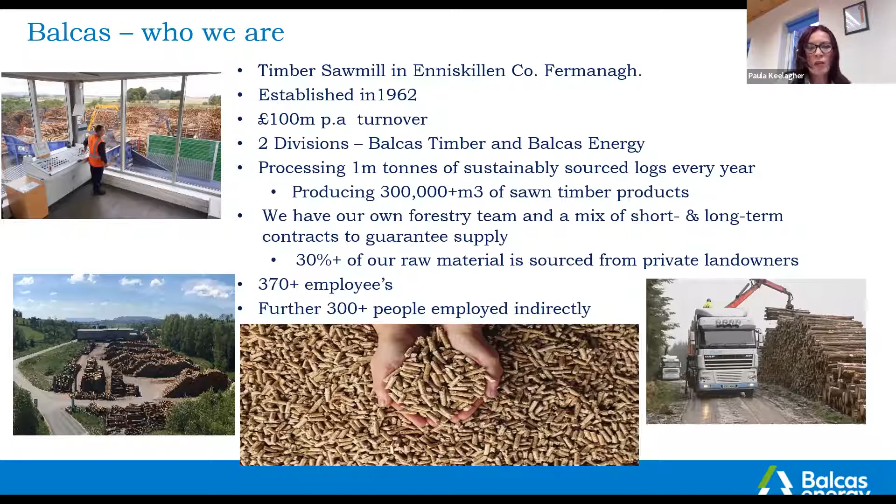30% of our raw material is sourced from private landowners. We have over 370 employees, and we've indirectly 300 other people employed, subcontracting, lorry drivers, etc. Balcas pioneered wood pellets in 2004 in Enniskillen, and then we had our Invergordon plant coming out afterwards in 2009.

We are very proud and pleased to be part of the Lennon Brothers group. Lennon Brothers is a family-owned Irish business with sawmills in Longford and Fermoy in Ireland, and Troon in Scotland, and timber frame home manufacturing plants in Arklow and Troon. The Lennon Brothers group, including Balcas, generates 14.5 megawatts of electricity. It's self-sufficient renewable electricity that comes from all of the forests of these islands.

We process more than 2 million tonnes of logs per year. 100% of this resource grows back in balance with its harvest. There's over 900 full-time employees, mostly in rural locations. Annual turnover is 350 million. We manufacture 800,000 metres cubed of sawn timber and produce over 2,500 timber framed homes. And I think we're a leading example of sustainable and circular economy in action.

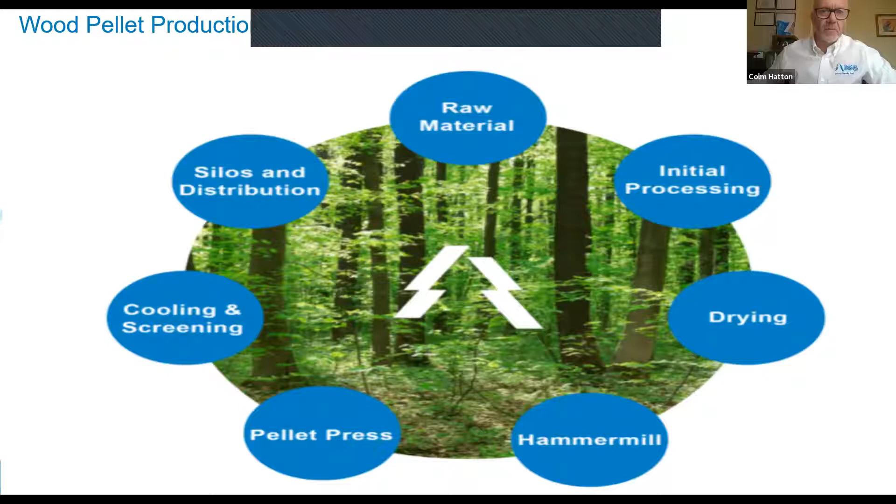I want to talk a little bit about the process of making wood pellets. So at the start, obviously, it's the raw material. This is high quality sawmill residues and inferior quality logs not suitable for use as sawn timber. Initial processing reduces particle size and screens out oversized material to improve the efficiency of the drying process. The material dries at an air temperature of more than 100 degrees centigrade, which reduces moisture content by up to 50%. And this is all using heat from our on-site CHP plants.

Particle size is further reduced in a dry material hammer mill, ready for pressing into ENplus A1 quality wood pellets. Raw material then is extruded through the pellet forming die at very high pressure. This process draws out the natural lignin of the wood, which helps bind the material together. The pellets are then cooled from approximately 90 degrees centigrade to less than 40 degrees. This ensures they are fully hardened.

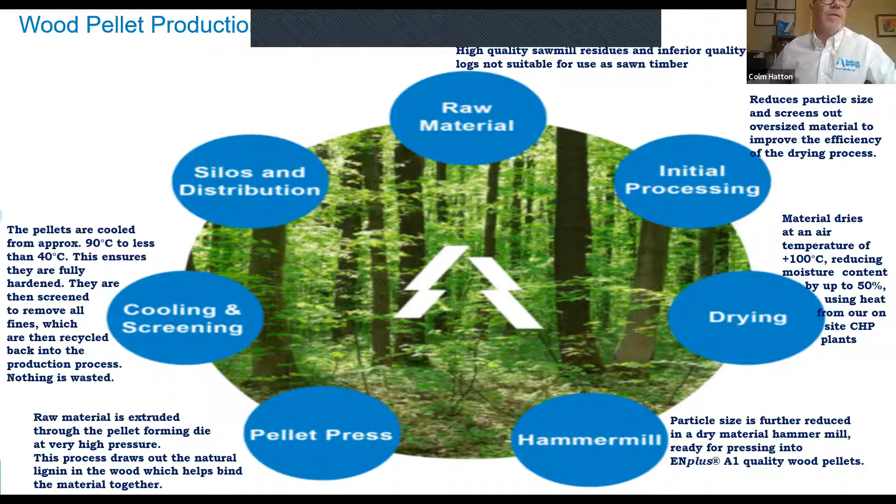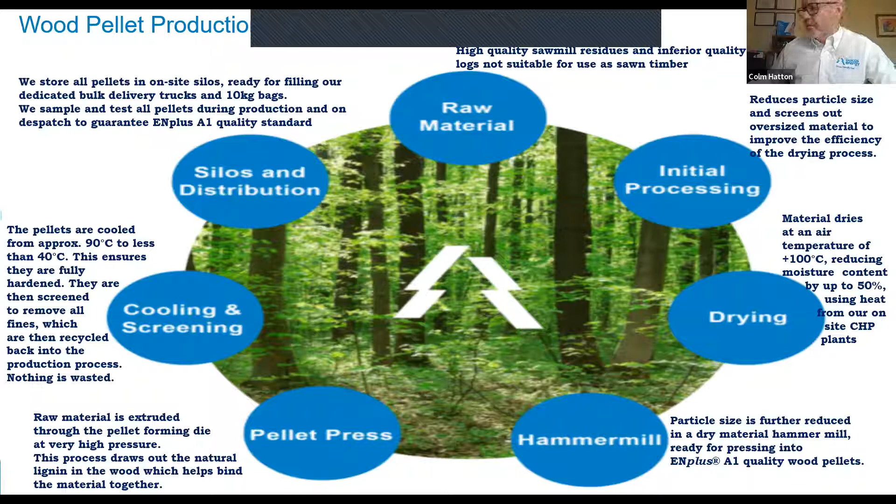They are then screened to remove all fines, and any fines are recycled back into the production process, so nothing is wasted. We store all the pellets in the on-site silos, as you would have seen in the previous picture, and they're ready for filling then into our dedicated bulk delivery trucks and 10-kilo bags. We sample and test all pellets during production and on dispatch to guarantee ENplus A1 quality standard. We have a little video here which very much explains the entire process from start to finish as well.

This tree is the future. The logs we use in Balcas are harvested from sustainably managed local forests. For every tree we use, we plant 4 more. Trees absorb carbon as they grow. Carbon dioxide is a greenhouse gas which is harmful in the atmosphere in large amounts. Forests can absorb some of this gas, which is why they are so good for the planet. Logs are transported to the Balcas sawmill where they are stripped of bark.

The bark-free log is then sawn into high-quality wood products for construction, fencing and pallets. These products store the CO2 for many years into the future. Left over is the bark, sawdust and wood chip.

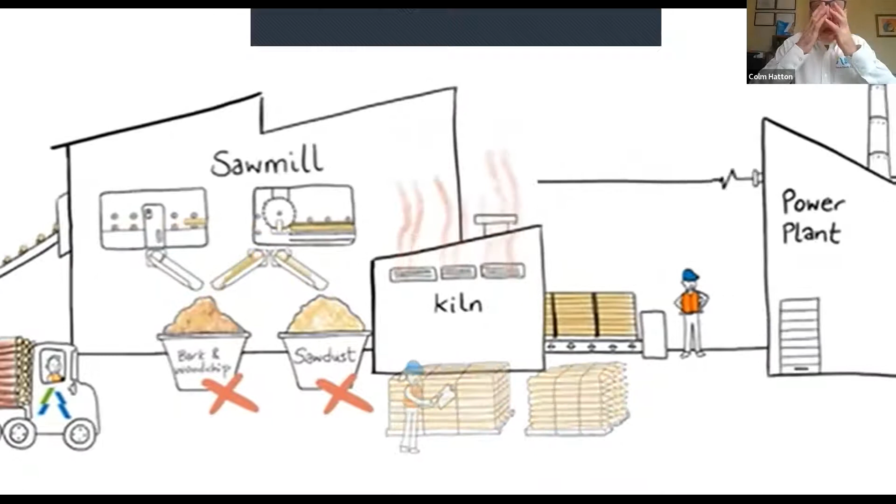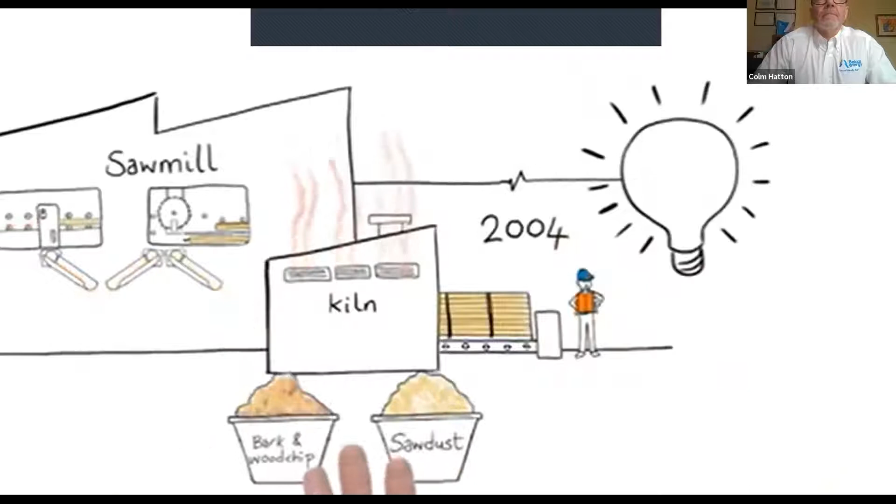In the past, these co-products were transported away and were not used as efficiently as they might have been, whilst the electricity and heat needed in our sawmill was generated using fossil fuel. So in 2004, our engineers had a bright idea: why not use these materials to create green energy to power our operations on site and also create a high-grade wood pellet fuel? And so we did.

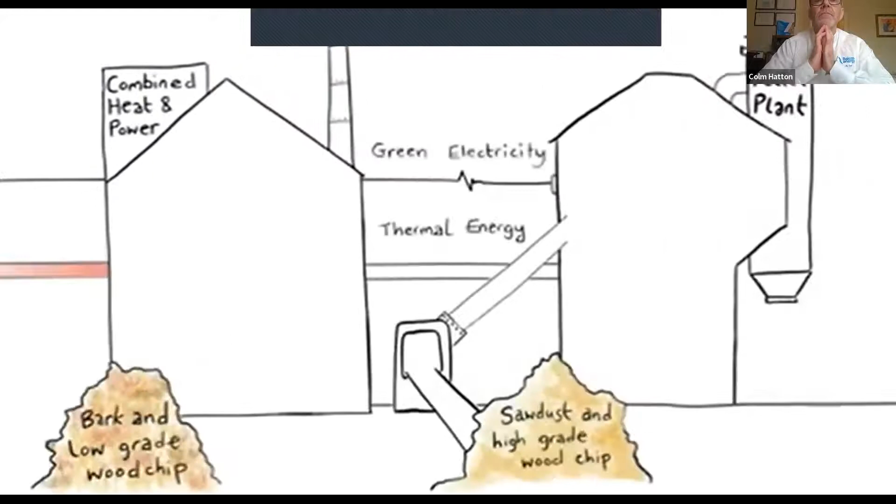We created the Combined Heat and Power Plant, CHP, and also the Pellet Plant. We are now operating these plants in Enniskillen, Northern Ireland and Invergordon, Scotland.

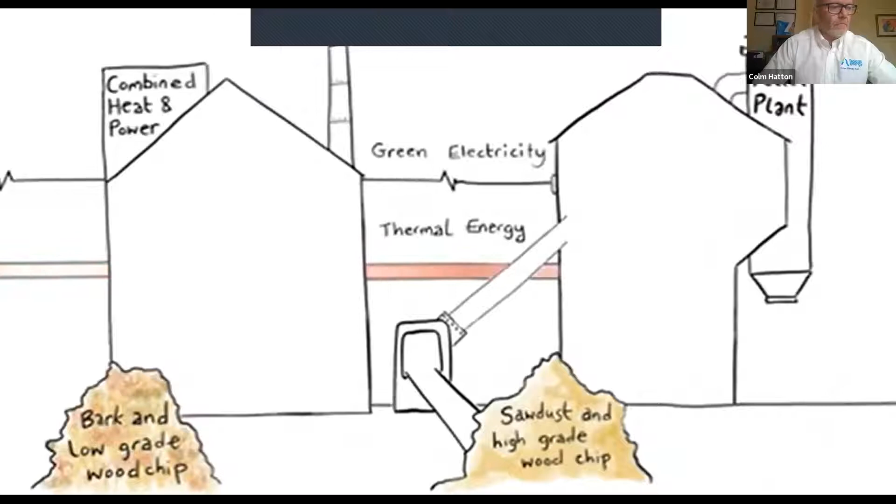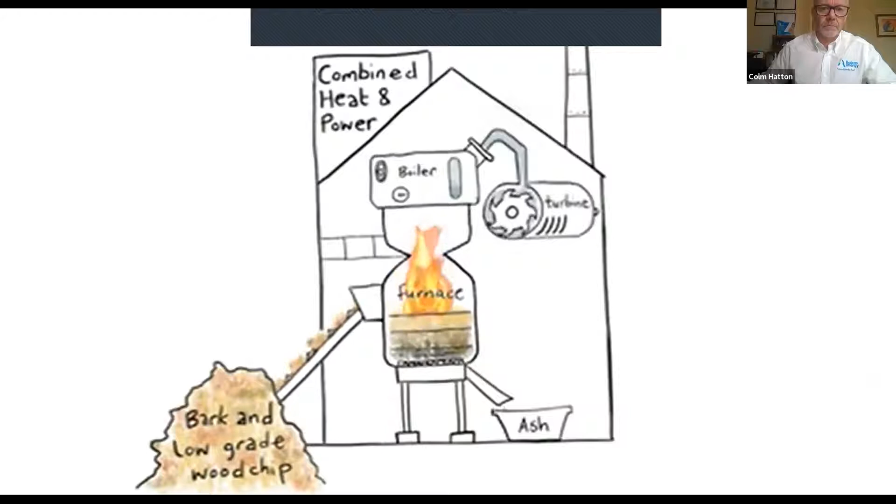In the CHP plant, bark and low-grade wood chip are used to fuel the furnace. Heat generated from the furnace heats water in the boiler to generate steam, a bit like a kettle. All this steam turns a large turbine to generate all the green energy, electricity and heat we need to use on site. In the wood pellet plant, sawdust and high-grade wood chip are refined in the grinders and dried using

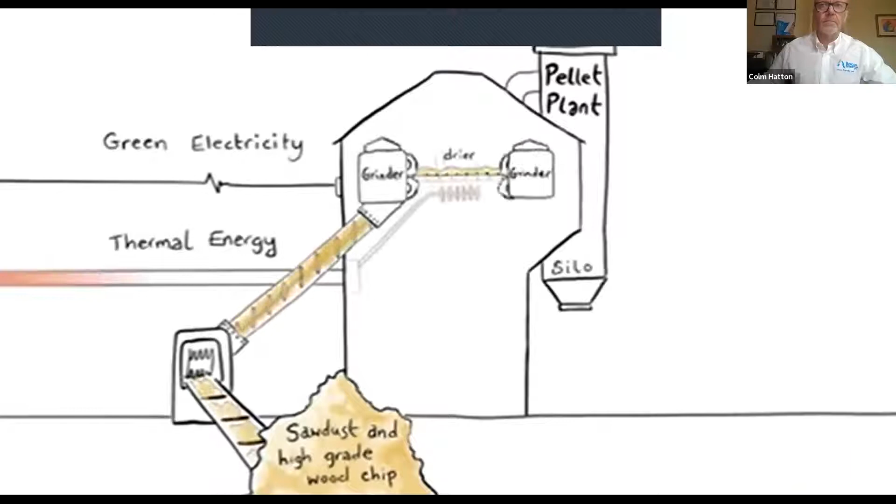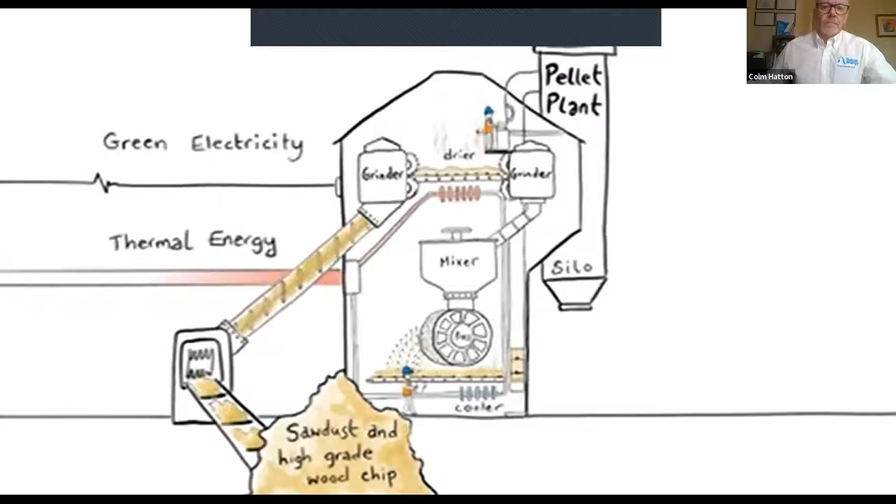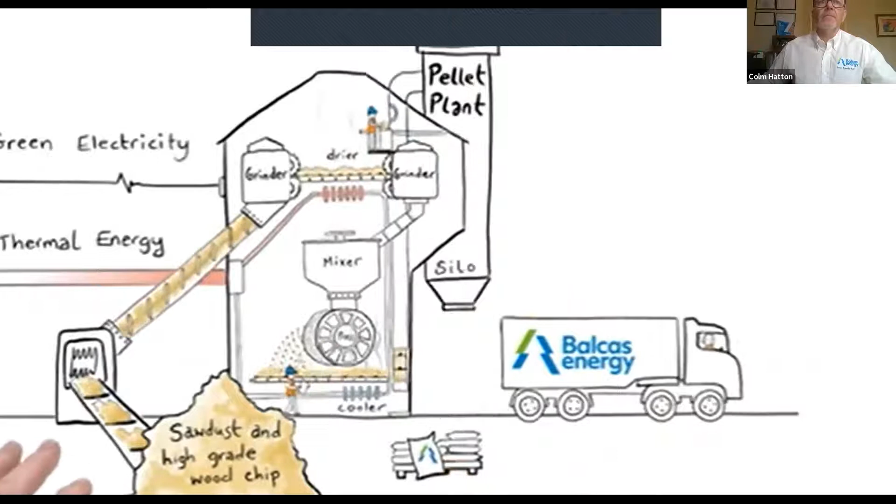the renewable energy from the CHP plant. It is further refined, mixed and squeezed into the pellet press where wood pellets are created and then cooled. We carefully screen to remove any excess fines, and all wood pellets are tested during and after production to ensure the highest quality. The pellets are then stored in silos, ready for dispatch direct to truck or in our 10-kilogram bags.

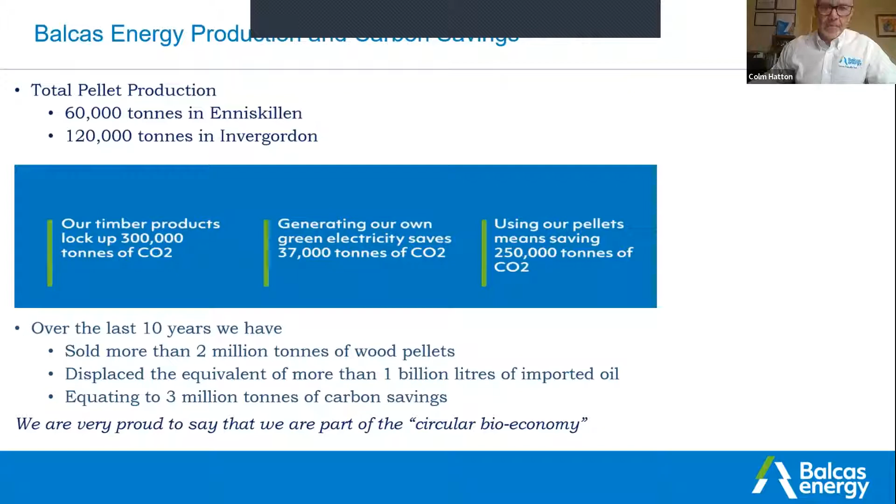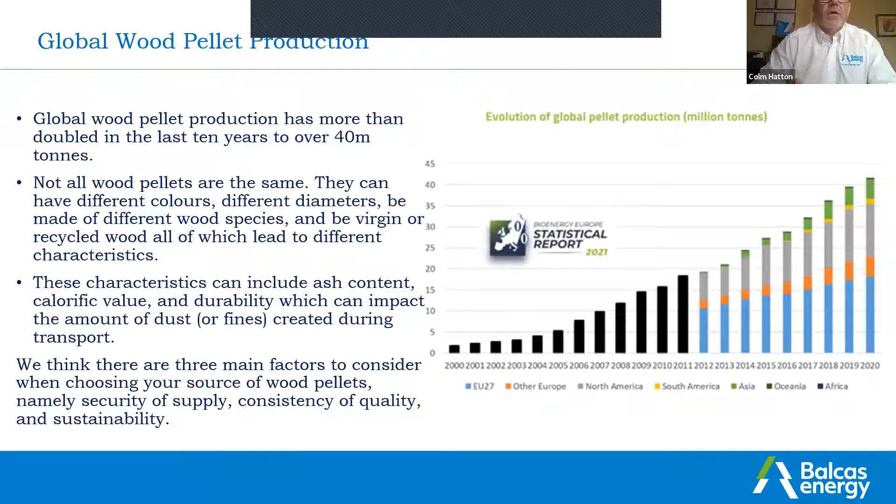Consistency of quality: as a manufactured product, it's important that you're getting the product manufactured in the same way all the time. You might have EN Plus pellets coming from somebody else, but if they're coming from a different factory, they could be slightly different. But if you're getting them from the same supplier all the time, you're pretty much guaranteed the same quality. And then obviously sustainability.

Pellet quality then: quality impacts many characteristics of wood pellets. The main internationally recognized mark of quality is EN Plus A1, which is recognized in 47 countries.

Depending on the wood fiber used to manufacture the wood pellets, the ash content, calorific value and other characteristics can vary. EN Plus A1 wood pellets are only manufactured from virgin wood fiber, so there will be zero contaminants on them that could damage appliance internals or create harmful emissions like you could get from burning paint or varnishes, which could be on waste wood.

EN Plus A1 covers both the production of the wood pellet as well as its delivery. It is important that you buy wood pellets that are both produced and delivered to the fully accredited EN Plus A1 standard. Even EN Plus A1 pellets from different sources will have different characteristics.

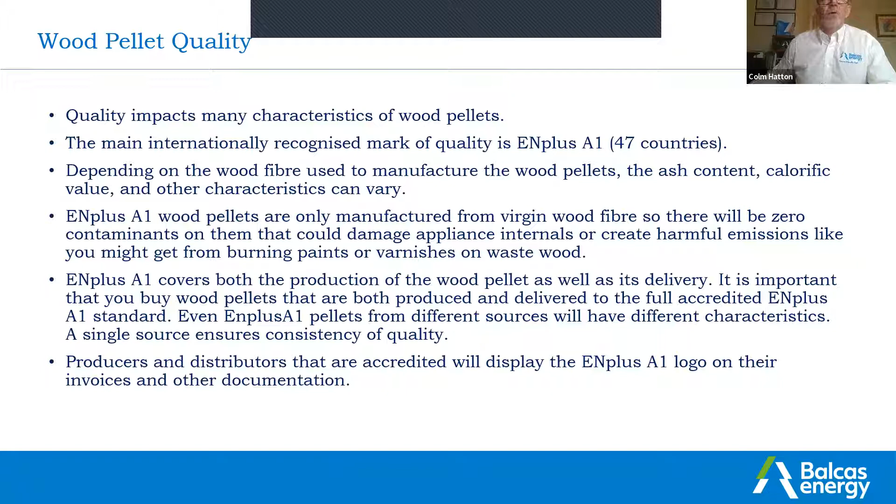A single source ensures consistency of quality. Producers and distributors that are accredited will display the ENplus A1 logo on their invoices and other documentation.

We have pellet producer and pellet distributor certification. Our pellets are tested on site during and after production to ensure quality standards are maintained. Samples are retained from every bulk load for traceability, and our pellets are also regularly tested by external independent laboratories.

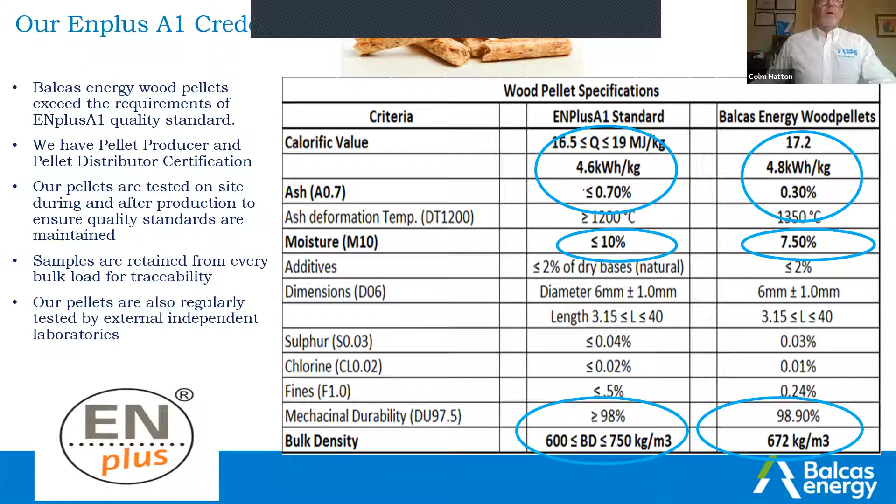Wood pellet sustainability is important, as we need to ensure only sustainably sourced materials are used for wood pellet production. A globally used measure of sustainability is the sourcing hub of Preferred by Nature, an NGO formerly called NEPCON, who carry out regular audits of how sustainable the timber supply is in different regions. This checks aspects such as the legality of harvesting, the legality of exports, protected species and areas, ethics, corruption, the legality of employment and wages, and health and safety.

So anyone concerned about the sustainability of the wood fibre used in producing the wood pellets they are using would be recommended to ask their supplier. Alternatively, you can make sure you only use locally grown wood fibre in locally produced wood pellets.

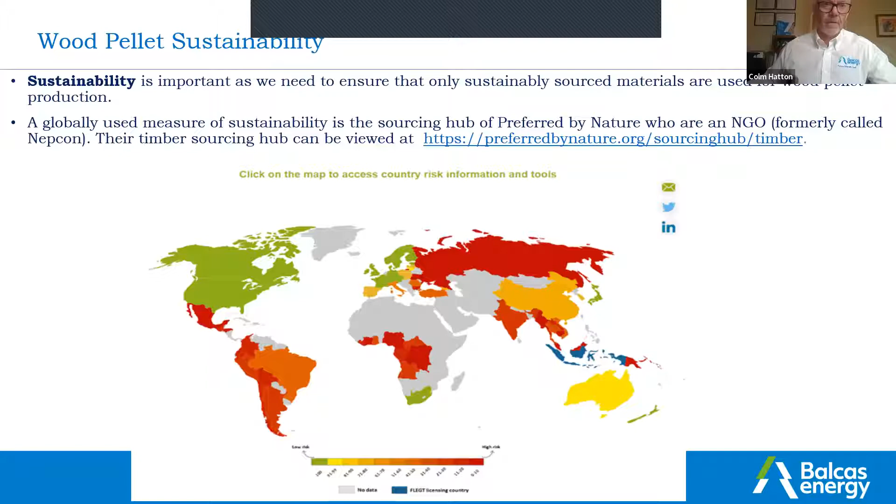So in summary, we offer a quality fuel that cannot be matched by other forms of forest biomass. They're manufactured to consistent, rigorous standards, have a low moisture content and a higher bulk density, meaning lower storage capacity is required for the equivalent amount of heat. They're produced locally, so there's a lower transport carbon footprint versus imported pellets, and fewer deliveries required versus wood chip, supporting well-paid jobs in rural areas, with full transparency regarding the source of the raw material.

Wood pellets offer an alternative fuel that can provide the closest replication to fossil fuel generated heat, even peaky heat loads and high pressure steam. We serve thousands of customers across Ireland and the UK and supply every type of heat requirement, from domestic hot water and space heating to industrial steam solutions and everything in between. More than 70% of what we do is to the commercial industrial market.

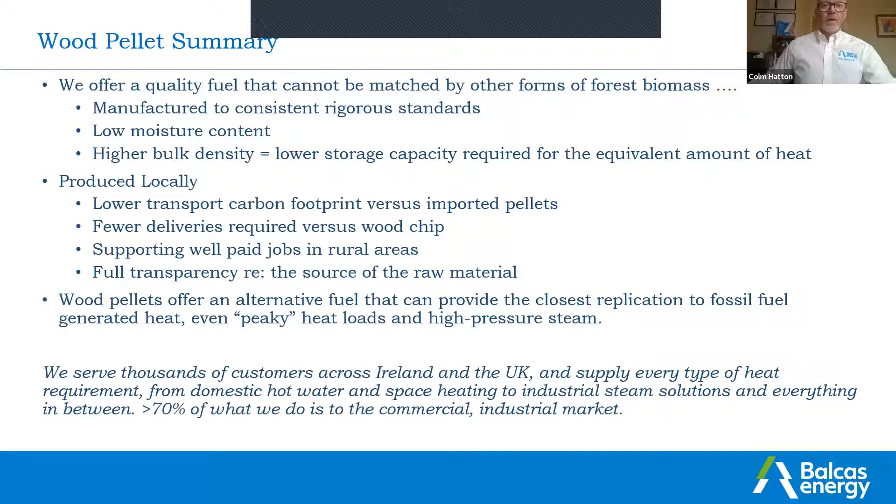This is just an example of new technology, I suppose. It's very new in Ireland and the UK because there aren't any installations at the moment. It's a powder burner solution which can deliver energy up to 50 megawatts. It's a tried and tested technology in Europe, with 25 years of industry experience and more than 100 proven installations. It copes like fossil fuel with various loads up to 50 megawatts.

Basically, it uses wood pellets, and rather than burning them in the traditional way, the pellets are ground down to a powder and then injected as an oil or gas would be into the flame. You can have a dual fuel option with either oil or gas. So one thing you could do is start the flame off for the first couple of minutes on oil or gas, then when the flame heats up, inject the wood powder in, and that maintains the heat. Another benefit is that it can start up and switch off almost instantaneously, so it works much differently than traditional wood pellet boilers.

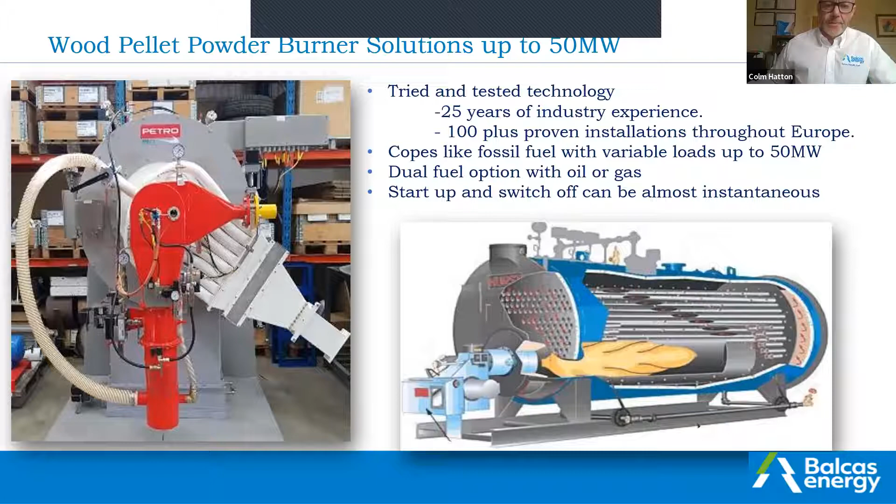Our wood pellet certifications: we're members of IrBEA, and we have ENplus A1 producer and distributor certification. We're WFQA approved, and we have FSC Forest Stewardship Council approval for our sustainable raw materials. We're BSL authorised, that's the biomass suppliers list in the UK, required to supply any RHI sites. We also have ISO 9001 certification for our quality management system.

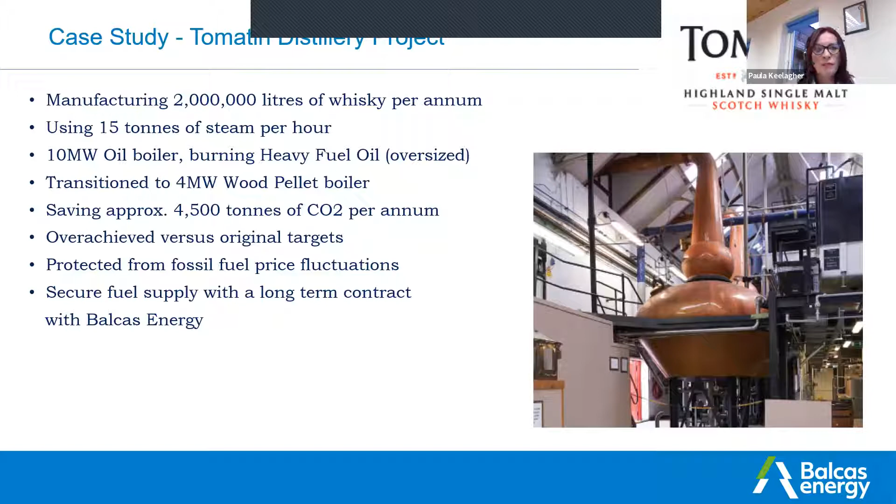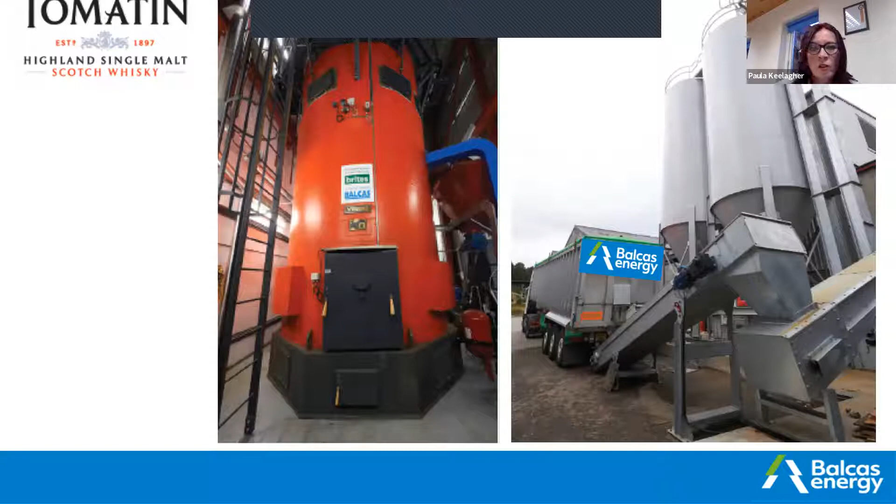So leading on from the distilleries, the great biomass myth: some people think that biomass is only good for base loads. This is not true, as evidenced here with the actual distillery.

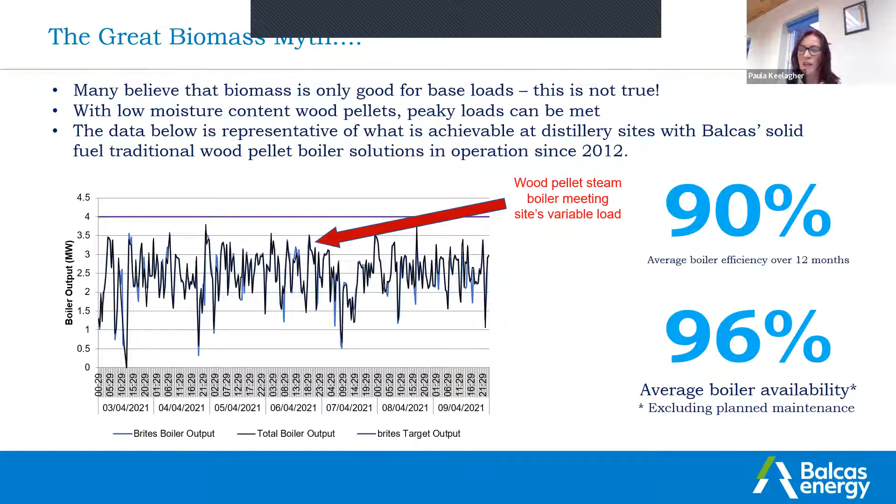A lot of these sites have remote monitoring, and that's how we manage them from Enniskillen. Whenever the customer needs, we actually offer fuel top-ups to a lot of customers, to make sure they never run out.

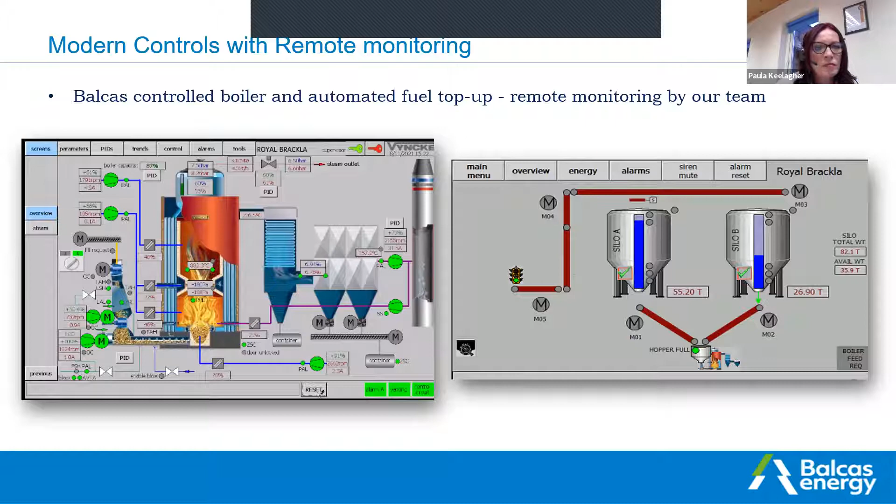Our poultry industry experience is something we're very proud of. We supply over 1,000 poultry houses in Northern Ireland and GB, with extensive experience in this. At a lot of these sites in Northern Ireland, we've been instrumental in helping them with their boilers and their storage, and siting the actual storage vessel to make sure we can get in and access it.

We've given a lot of help and advice. We deliver over 45,000 tonnes of fuel per annum to some of these sites. This generates 200 million kilowatt hours of heat and produces over 160 million birds. A lot of the farmers give us feedback, and they've said that since they've changed over to wood pellets, they have a healthier bird.

They think the heat is much more ambient and healthier. It has improved the fabric of the building - there's less moisture in the actual building, and the birds are turning around quicker and heavier. That's just some of the feedback we get, and we've had some verification from Moy Park about this as well.

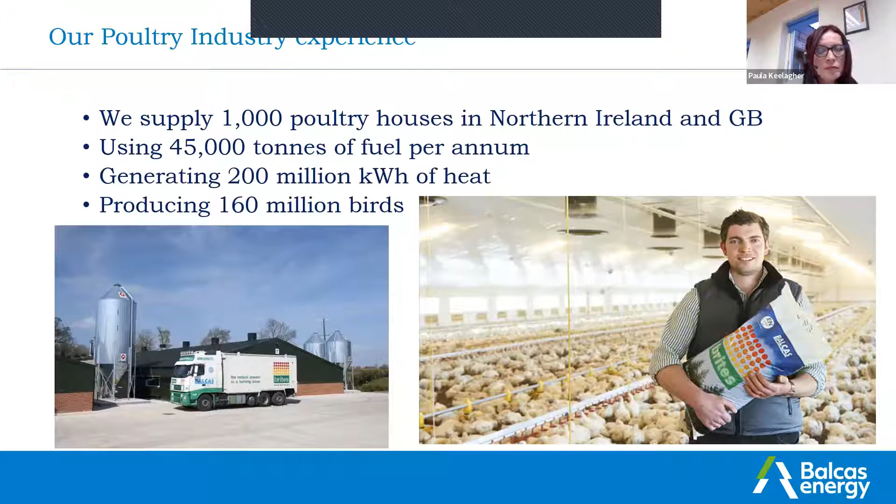Other customers apart from distilleries and poultry, we have a range of customers. So I think what I'm trying to show here, it doesn't have to be a poultry site or a distillery. It can be any kind of site. We have car sales yards, we have lots of hotels, and we have councils that would have swimming pools on site and leisure centres, and those are big heat users, and it's very attractive for councils.

We've worked with the National Trust, and the National Trust have a lot of listed buildings, so we've been very instrumental in helping them with their boiler sitings on site, because they can't have a big silo sitting out looking very ugly whenever there's visitors coming. So we've been very good in trying to get storage sites put into sheds, all that sort of thing, and that's been a good story. We also supply a concrete company, so there's a diverse range of different customers.

We work very closely with government departments, Department of Finance and Personnel. They have over 15 sites that we supply, and we've been doing that for the last 10 years. We also supply the 20 sites in the Northern Ireland Health Trust, and that includes the Southwest Acute Hospital in Enniskillen, and that's a 4-megawatt installation. And just to give you an idea, there's about 4,000 tonnes per annum that goes there, so it's quite close to Balcas, and we're supplying that for over 10 years as well, and we're quite proud of that.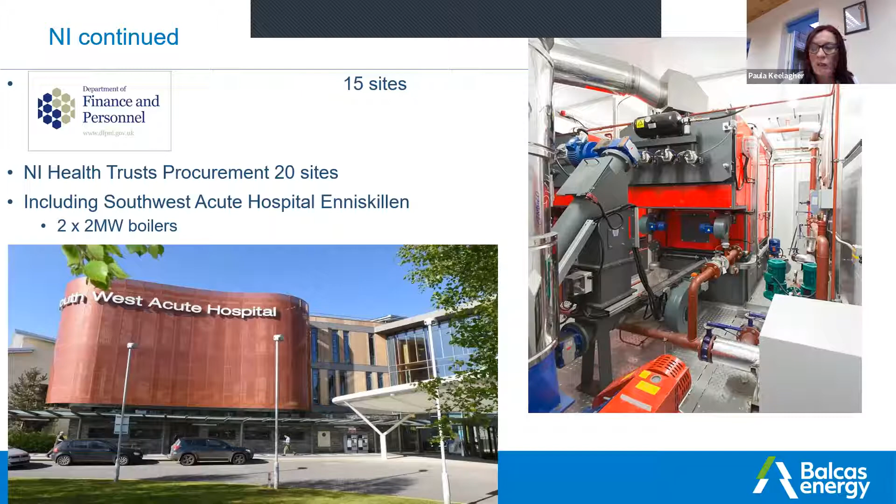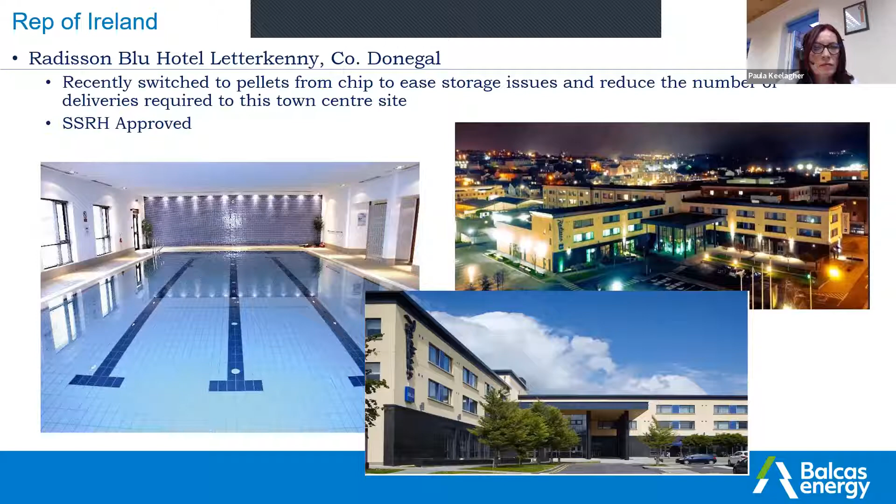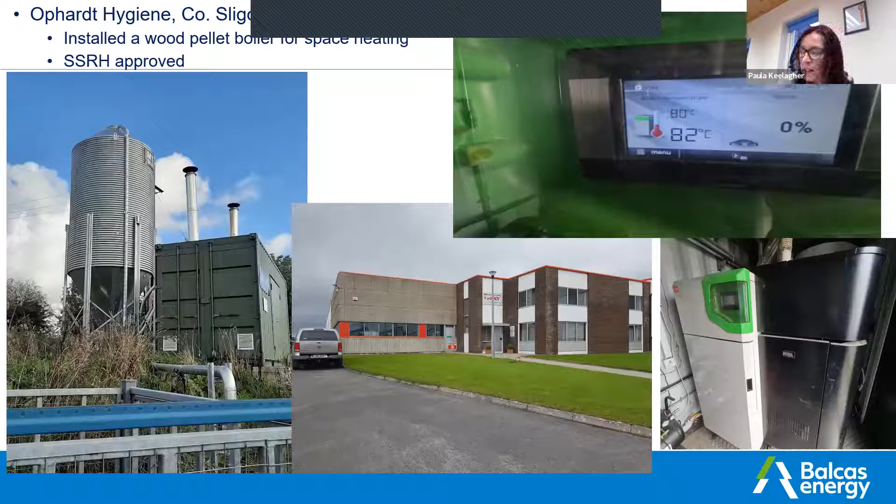This is another one of our new clients. This is Ophardt Hygiene in Sligo. They've installed two 125 kilowatt boilers. They're also very happy with the installation. They have a silo on site and a cabin, and this supplies space heating to the building, and they've been working very well for them as well.

I'll hand back to Colm now to talk about biomass supply.

Okay, so a lot of questions you get asked is where is future biomass supply going to come from? So we've looked at this from our perspective as being our wood pellets coming as a co-product of the sawmill, and how that can affect where the supply is going to come from. So if we look at the Ireland and UK sawn timber market, it's currently about 12 to 14 million cubic meters per annum. Locally produced sawn timber is matching about 4 million cubic meters of that, and Glennon Brothers have about 20 to 25% of that market. So that means that imports are hitting about 8 to 10 million cubic meters. So there is an opportunity to take some of this volume with increased local timber supply.

There are about 4 million cubic meters of roundwood maturing in Ireland every year. This is expected to double over the next 10 to 15 years. The average sawmill yield is around 50%, a little bit more maybe, depending on what's being produced. So this increased availability should make more residue available for alternative use, such as wood pellet production and CHP fuel. Increased investment will be required if local producers are to increase their share of the UK and Ireland sawn timber market. This could substantially increase the availability of wood pellet fuel and also protect against unsustainable production leading to forest depletion.

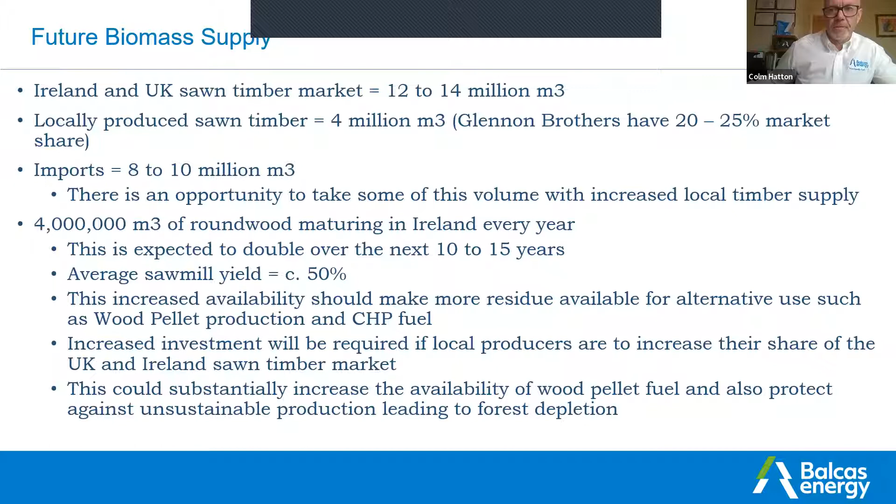If we look at forest biomass then as an economic driver, the Austrian Biomass Association says that to heat an average home with forest biomass requires approximately 23 man-hours of local labour, and local is the operative word there, and I'll explain why. To heat the same house with oil requires only 3 man-hours of local labour, and with gas it's only 1.5 man-hours.

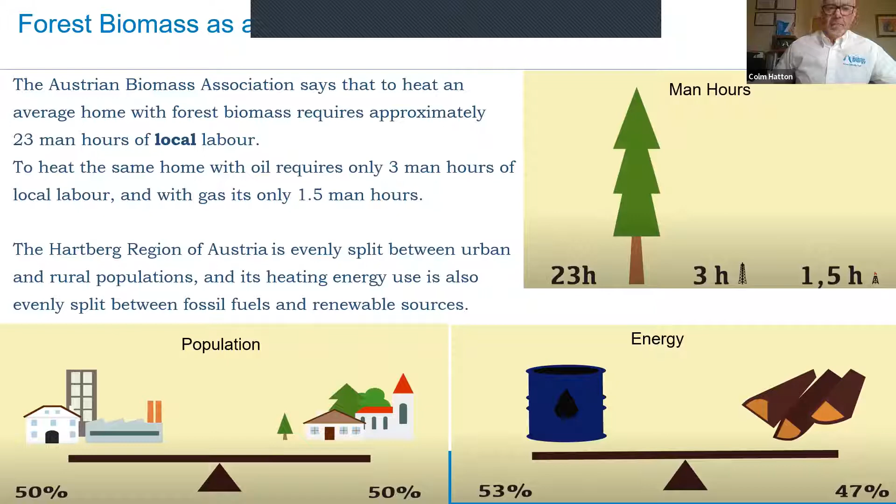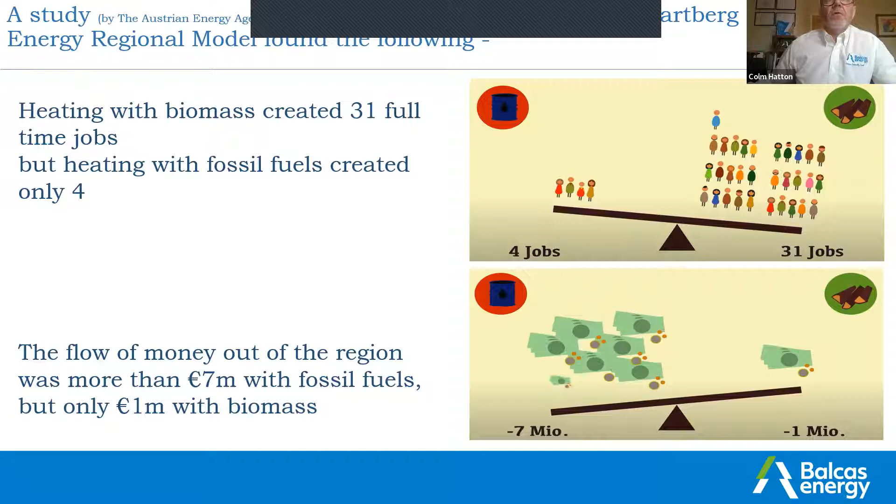The Hartberg region of Austria is evenly split between urban and rural populations, and its heating energy use is also quite evenly split between fossil fuels and renewable sources, being 53% fossil fuel and 47% biomass. A study on the Hartberg Climate Energy Regional Model found the following. Heating with biomass created 31 full-time jobs, but heating with fossil fuels created only 4. The flow of money out of the region was more than €7 million with fossil fuels, but only €1 million with biomass.

What are the implications of that? Well, if you look at carbon emissions, there's 31,000 tonnes being generated by fossil fuels and only 800 by biomass. If Hartberg were heated with biomass alone, the number of jobs would grow to 61. The cash outflow would fall to €1.6 million, and the carbon emissions would be only 1,600 tonnes. If fossil fuels were only used, the number of jobs would fall to only 9. The cash outflow would rise to €15.1 million, and carbon emissions would be 58,500 tonnes.

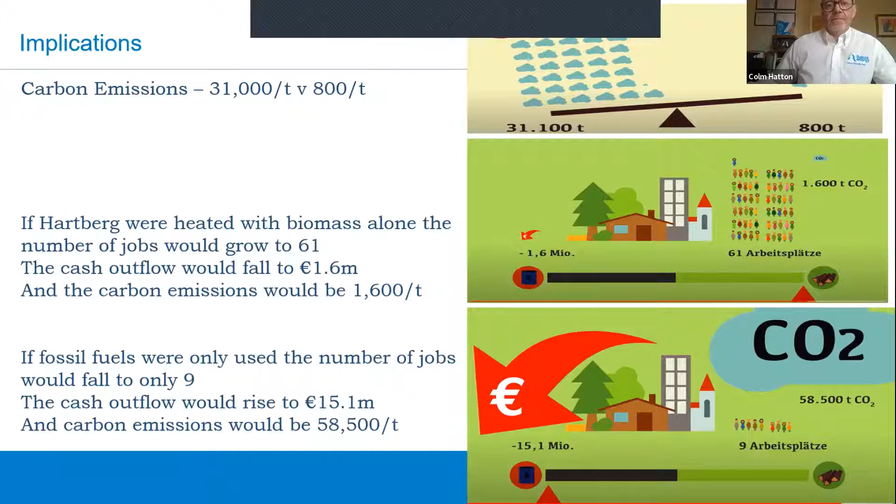So what's the conclusion? Well, money spent on fossil fuels leaves the local economy and fills millionaires' pockets in faraway places. But when we heat with local sustainable biomass, we protect local jobs, we improve the local economy, and we significantly reduce carbon emissions.

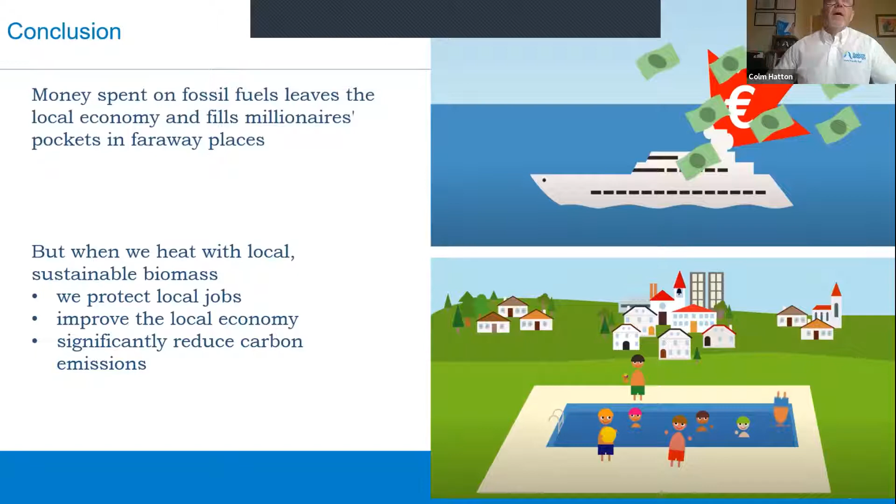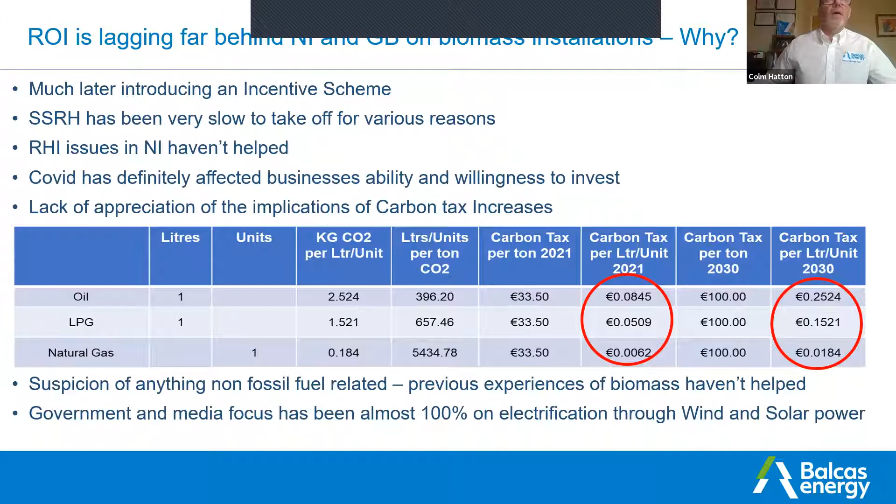So what are Balcas? What do we do, or how are we expanding our client base and the number of installations? So the options available from us are, like, we can do fuel supply. If somebody has an installation already and they want pellets just as an ad hoc delivery, then we can do that as people ask for it. It'll be at market price at that particular moment.

We can also do a fuel supply contract where we'll have a price agreed for a set period of time. And also we will do energy supply contracts, or ESCOs. These can be client funded, third party funded, or Balcas Energy funded. We're open to taking on projects from third party installers or energy consultants, or if somebody wants to come to us and is thinking about an installation and is looking for advice, we're quite happy to talk to them.

What we will do then is we'll work with the client, and we're involved in the entire process, including selecting the best installation partner for the project, sizing the boiler and the system design. We have our own in-house engineering team who will be involved in all that. We can help with the SSRH application. We'll be involved and on site as boiler and infrastructure installation and commissioning is going on. Your fuel supply, obviously, and if somebody has a contract with us, we can guarantee fuel supply for the term of the contract.

And this goes back to the point about people with bad experiences, we would be very hot on making sure that people have an ongoing maintenance and servicing contract to ensure the boiler is always working properly. And for us in particular, if we are providing the ESCO, it's very important that that is done, because obviously if the boiler is down, it's going to cost us money because we're not going to be getting paid for any heat. Any heat that is generated, that is used, is billed monthly per metered kilowatt hour. So that's much the same as somebody would get their electricity bill.

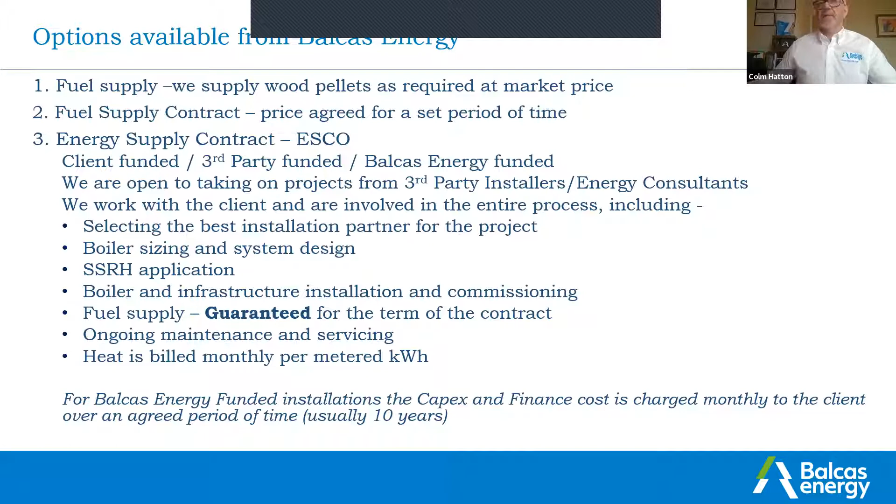So much the same as Paula spoke of at the beginning. We all know what the headlines are. Climate change is coming. People have spoken about the problems that COVID has caused in society, with people not being able to go to work, people not being able to go to school, all of that. But if climate change goes where predictions are saying it could go if we don't act, then it's going to make COVID look like a walk in the park by comparison. None of us want to be there, and we all want to play our part. Balcas Energy, we're very much focused that we want to play our part in decarbonising the Irish economy.